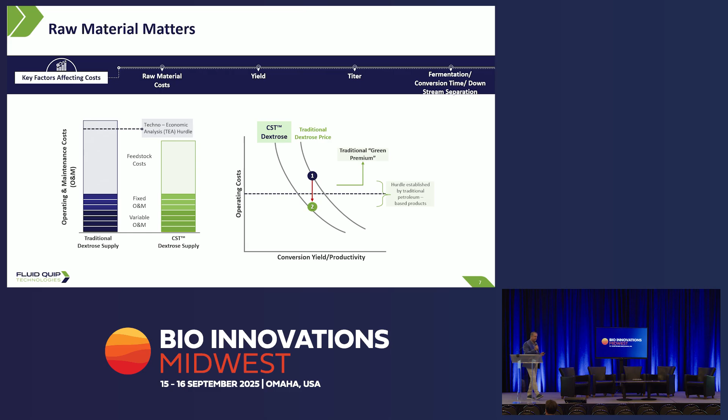So how did that come about? Well, it took us about 10 years to get there from the initial ideation of this clean sugar technology, back in a lab when we were trying to produce starch at a dry corn ethanol plant like a wet mill does. And going through the whole analysis, we're like, well, why do we care about starch? A wet mill does a great job at producing starch. We don't care about starch. We care about dextrose. We want the end product. And so over iterations and lab experiments, we figured out we can make sugars and then separate those sugars from the process and feed them into these bioreactors, and also make ethanol.

And so over the years, we de-risked the technology by starting in the lab, moving to a pilot, doing a lot of the engineering work around figuring out what are the right technologies and solutions. And we went through a lot of different technology iterations and equipment selections to figure out how to get to the right process with the right carbon footprint and the right yields.

Ultimately, getting to a pilot facility out in York, Nebraska here. It's about a 2-hour drive due west of here. And then eventually partnering with our parent company, Green Plains, built the full-scale commercial system in Shenandoah, Iowa, which is about an hour, 10 minutes south of here, and truly integrated that bio concept together in that facility where we put the clean sugar technology with an ethanol plant. And then again, though, it took us 10 years to get there and a lot of capital.

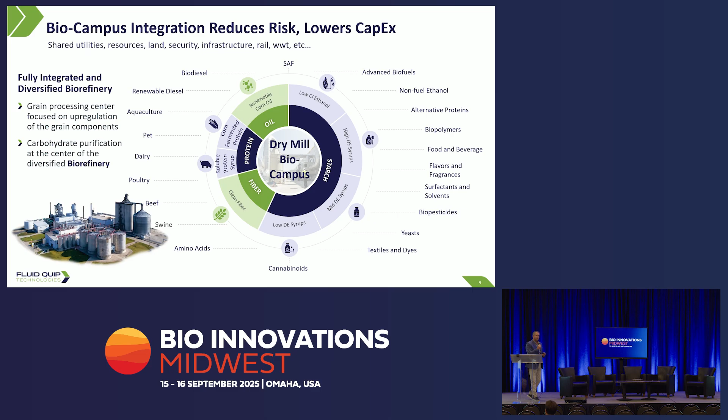And again, we see the carbohydrate revolution coming. We think that more and more of these products are going to be carbohydrate based. Yes, there'll be some that are fiber, some that are oil, but the vast majority are carbohydrate based. And you need a low CI, and you need to be integrated. Because why would you want to have to put in all that extra capital for utilities and roads and infrastructure when a lot of the biocampuses, a lot of these ethanol plants have that today? Reduce your costs, reduce your risk, reduce your mitigation is what we're looking at.

So with that, it all starts back at the beginning. As I said, we're a process engineering company. Our focus is around how do we ensure the design works from the start. And again, we follow this process, this front-end loaded process, and a lot of people say, well, I just want to skip it. I just want to jump to the end. The problem is when you're jumping to the end, that's where you have problems. That's where you have risks. That's where you have unknowns. And yes, this may take a little bit longer, but as you go from FEL 1 to 2 to 3, you're constantly de-risking the project.

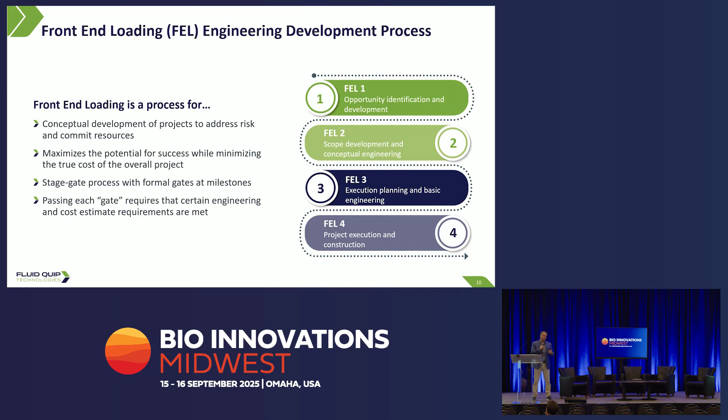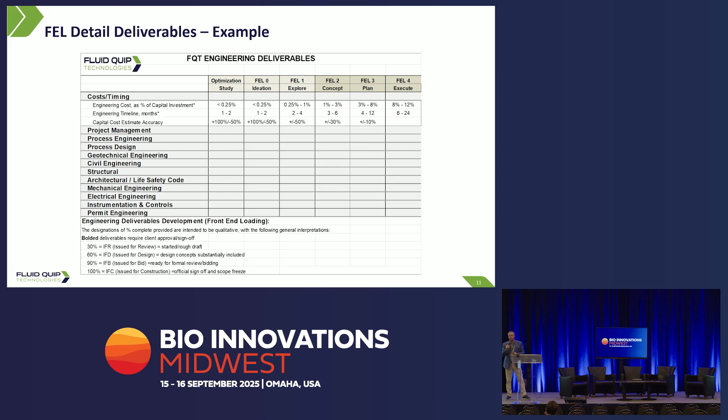And what you're also doing is, and this just gives you an example of the output, as you move from left to right, from the ideation stage to the finalization stage of that engineering design, you're also reducing your capital cost, and you're reducing your capital cost risk mitigation. So it all starts, to me, with the process engineering. All the other engineering, commodity engineering, that's easy. You got to get the process right. And you want to work with people that have been there, right? Have those known failures, know how to design things, know how to design risk, know how to design waste out of the system.

So when we look at our engineering and when we work with a client around how do we reduce risk, it starts with the mass and energy balance, and then we overlay different technologies, different programs, different tools that we have to leverage how do we design the right system, the best system, the smartest system for you. And from there, we also look at, okay, how else do we integrate other technologies, other integrations?

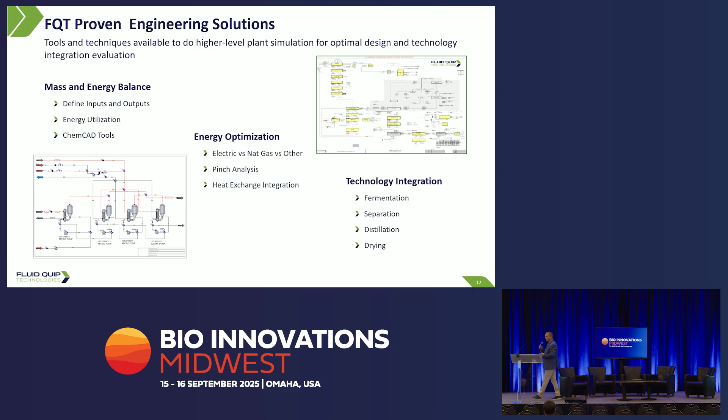How do we look at energy? Is it nat gas? Is it solar? Is it electric? Do we want to go fully electrification? Do we want to put mechanical vapor recompressions everywhere versus steam? We've got a design. A company wanted that. They want no nat gas for the site. It's an ethanol plant. It's 100% designed on electric generation of the process.

So then we say, okay, what else besides the process engineering? You also got to look at the other components that come together when you're looking at scaling up a technology, and that's around, okay, what is the balance of engineering? How do we smartly design the system? How do we integrate with an existing plant if we're co-locating at a biocampus? Things like that. Also, we have partnerships with a lot of the major enzyme and chemical companies to also look at where do we integrate that? How do we integrate those other systems into the equation?

And I think the last one here, this equipment manufacturer, that's probably the one big thing is we're not just an engineering company. As I said, we're a technology company, but we also work really close with a lot of the equipment suppliers to make sure that their equipment is designed properly for your system.

So we have a lot of embedded IP in some of these equipment manufacturers because we know exactly what needs to get done. How do you make that final product? So it's not just the engineering up front. It's the engineering all the way through the chain that's critical.

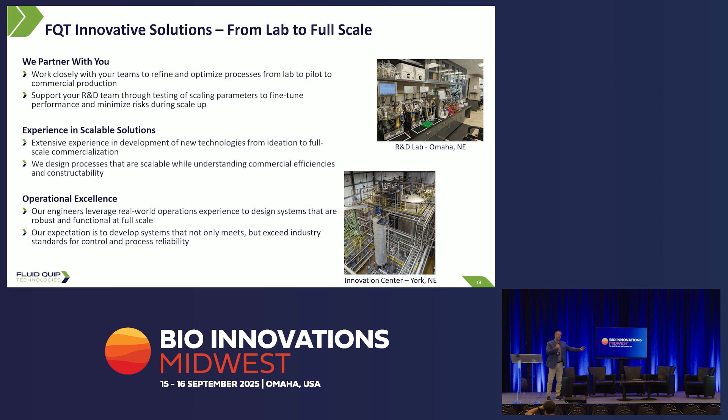Some of the other things that we bring to the table too, just as I mentioned, we have a lab here in Omaha, and then we also have the pilot facility out in York, Nebraska, which is about 2 hours from here, which is one of the Green Plains facilities there. And so we can work with you on lab scale simulation. It's amazing what we can do on solid liquid separations, distillations, things like that, fermentation at the lab scale, and then take it to our pilot scale. Again, it's de-risking each of those stages along the way.

Again, just our technical support. We've got a team here in Omaha and out in York. Give us your problem. We love to solve problems. And I think that's one of the unique differentiators, because a lot of our engineering talent that we bring on board has been in your shoes. They've been in production. They've seen things. They've scaled up stuff globally, not just here in the U.S., but global presence.

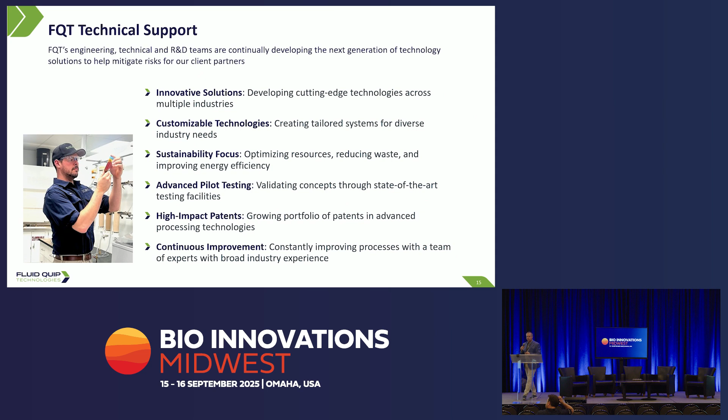And so in the end here, really when you think about what is needed for successful commercialization, starting at the beginning, we can't push enough. I know there's a lot of smart people here that love to play in the lab and design experiments, but you got to get it out of that beaker as fast as possible to de-risk it. And that's where we can help on the engineering side.

Also, how do you scale it up? You got to do 3D modeling. Right? How does everything interconnect? One of the things is it's kind of the ripple in the pond effect. If you push on this part of the process, you have to understand what's going to happen over here. And that's where that advanced modeling and other tools come into play.

I would say then on our R&D side, I think right now we have 85 issued patents for our company. So there's a lot of innovation we bring on new technologies, how to separate proteins, how to purify streams, things like that. And again, also look at energy integration. That becomes a bigger and bigger driver on the energy side, because it's not just, hey, can I make this product? What's the carbon footprint of the product? How do I mitigate that carbon footprint all the way through the entire process?

And again, as I said, we have a global presence. We've got projects around the world: Brazil, South America, Europe, U.S., and then also we do a lot of turnkey projects. We've done about $1 billion worth of capital here in the U.S. and around the world.

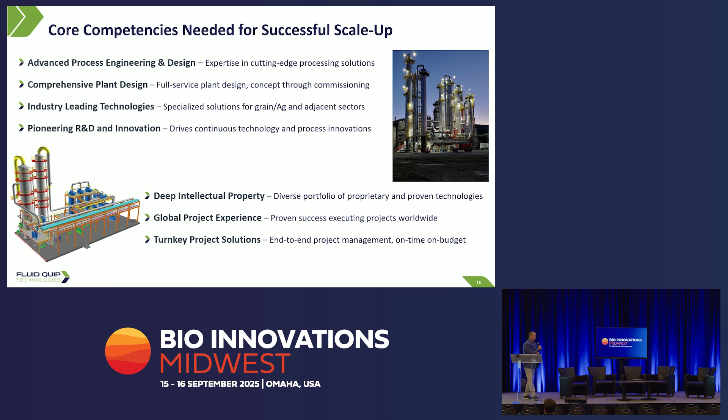So with that, I'm going to one last slide. Again, just kind of coming back to the beginning here around integrating that engineering and technology early in the process. What is your feedstock? Where are you going to pilot this? Right? We heard some presentations that Europe does a great job at CMO. I thought I saw Mark here, Liberation Labs is building a facility here in the U.S. We need more of those facilities. There are quite a few. A lot of universities have facilities. We can work with you and those universities in terms of how do you de-risk the process? How do you ensure your capital is well spent?

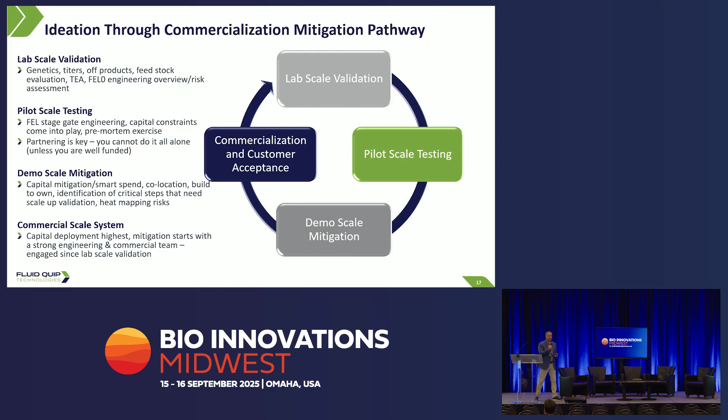Because if you could just go from lab to commercial, that would be great, we would all love to be able to do that. But you got to go through these steps. You got to de-risk, and having a strong engineering partner with you along the way is absolutely fundamental, in my opinion, and hopefully yours as well.